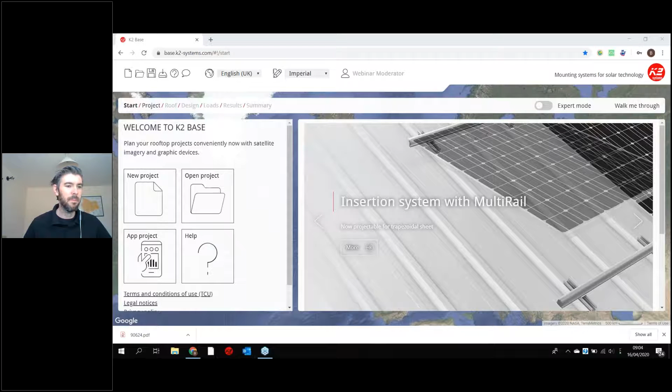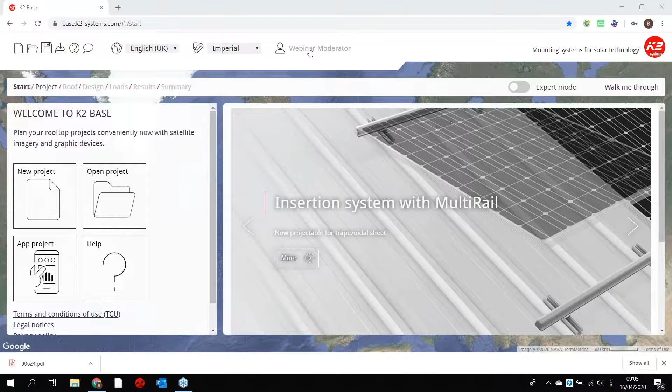So this is the start screen for Base. You'll see I'm logged in as a webinar moderator. You can use a reduced function version of the software without a login, but we recommend that you do get a login, which is very simple. You'll see there's just a sign up button here, and we will process that application immediately. So getting an account is free and it's easy, so we recommend it.

And then once you're logged in, you'll see up here your username. This is the way the screen is set out. So we have here the 4 boxes: new project, open project, app project, and help.

Now, app project is something we'll leave for future webinars. We've got a very nice, very clever smartphone app, which can interface with this software. There's more information on that on our YouTube channel and on our website, and there'll be webinars on that subject.

We also have these up in the top left screen, the same: new project, open project, save project, download project file, help, and Sherpa. Now, Sherpa, just quickly, is an online help chat, which also works over the WhatsApp platform. Again, we won't look at that today, but that's useful to know.

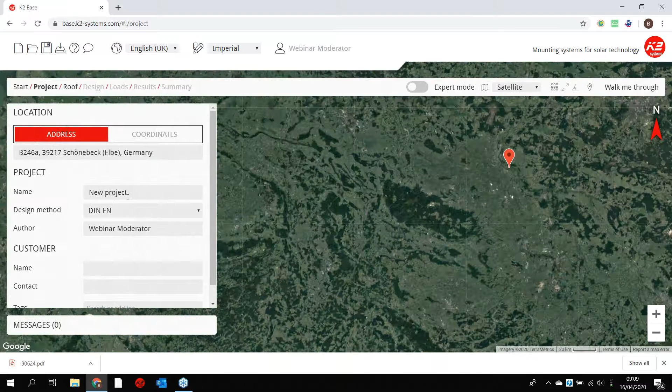Now, when you're working with an existing building, it's a very useful tool. For example, if we have a look here at the K2 Systems headquarters, you can see there's some nice buildings here that we could plan a project on. I believe that is K2 here, but there is a nice roof that we will use for this webinar up here.

So I could enter the address manually for this roof, or because I found it here, I can double click on it and the address autofills here.

Now I can put in a name for my project, and it's good to name all of your projects because on your user profile, you'll have all of your saved projects. By putting in a project name, as well as your customer name and contact, it's easy to keep everything looking neat and tidy and find all your previous projects. So for this one, we could just call it webinar 16th April.

The author automatically fills to your user profile name, but if you wanted to change that, you can. And then in here, you would put your customer name and your contact name.

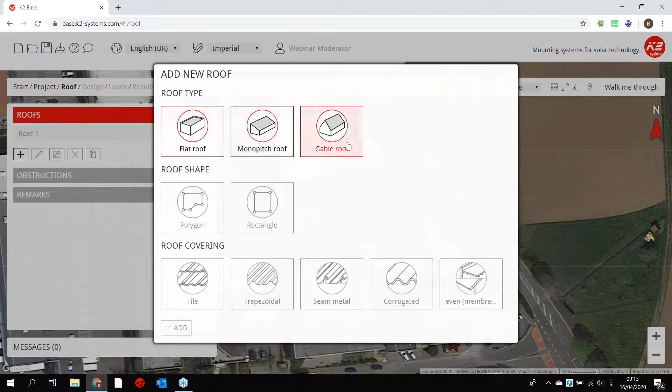So you see the options here again. We can access this button and not yet these buttons. And by holding your cursor over the buttons, you can see what each one is a command for. So here, add new roof, we click the button, then these are our options. So we want to plan a flat roof.

Now we can plan two roof shapes for flat roofs, polygon or rectangle. Rectangle is a simple four-sided shape. Polygon is a roof shape of infinite sides that you can draw accordingly. So to keep things simple, we'll go rectangle.

And then for roof covering, we only have one option because flat roofs really only have this option. But you can see for the software, we can also plan tile roofs, trapezoidal roofs, seam metal roofs, corrugated roofs. So we select flat roof, rectangle, and even, and then we add.

Now, I've received lots of phone calls from people who get to this stage and say, I've added a roof, but it's not there. This is because now is the time when you draw the roof, and you'll see the mouse cursor has become a cross. So we want to click on each corner of the roof and draw out our outline.

Now you see here the dimensions of feet, and up here we can toggle between metric and imperial. We'll use metric.

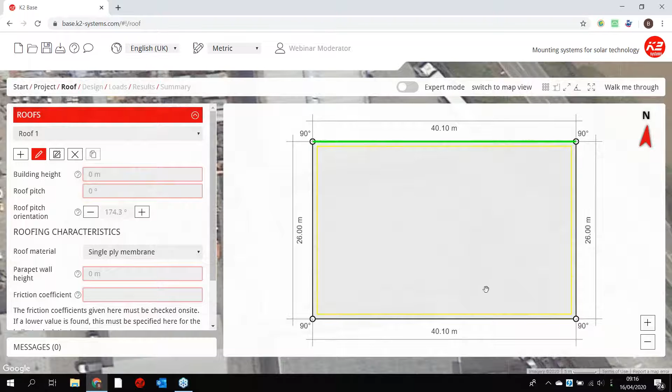And another regular question we get from people, they say, the building is not built yet, so how do I plan on K2 Base? Well, you can still find the approximate location and make sure you're working with the right local codes. But then by working in 2D view, you can ignore all of the Google map imagery and just work with the roof shape as you see here. So it doesn't matter if the roof is not on Google imagery yet, if it's a building that hasn't been built yet. So you can work in map view or 2D view, and you can constantly toggle between satellite, hybrid, and road map.

Now you see here on the left-hand side, some more options are available to us. There are some boxes that have come up in red as a reminder that these are important things that need entering.

We'll start with building height, which is self-explanatory, but for many of these parameters you'll see question marks. If you click on the question mark, you'll get a visual clue as to what you're doing, showing what building height is considered for a pitched roof and for a flat roof. For a pitched roof, some people might measure the height at the eaves or the gutter, but what we want is the height at the highest point of the roof.

So we enter our building height. You see here it's got 0 meters as default. When you type in your building height, you just put a numerical value, you don't need to put M for meters. So here we have a 10-meter building.

Now roof pitch, presumably we would expect something like a 1 or 2 degree pitch. So let's say 1.

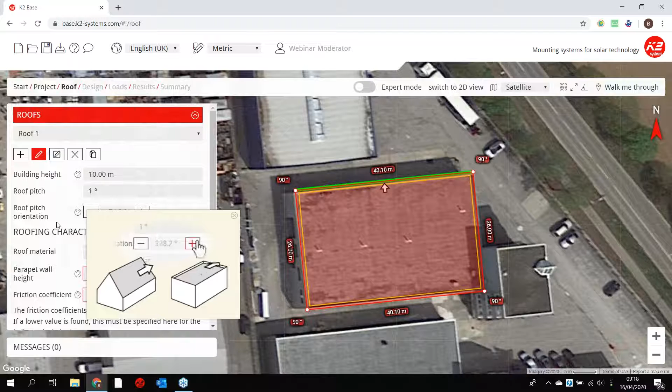Now roof pitch orientation, as we see here, we have the same parameter whether it's a pitched or a flat roof. For this, we want to know which way the roof does slope, so which direction the water would run off. We can change this with the plus and the minus, and you'll see on the main screen that the arrow points to a different side of the roof each time. So the arrow dictates which way the slope runs on the roof.

Next we have roof material. Our options are single ply membrane, bitumen, green roof and gravel. The reason we ask is because the thermal expansion parameters and the maximum rail lengths are different for the first two than for the second two. That is, we allow larger array blocks and larger rail lengths on green roofs and gravel roofs than we do for single ply membrane roofs and bitumen roofs.

This is because of the concept of caterpillaring, how a system has the potential to move slowly over time, and obviously we want to plan our system so that this doesn't happen. The problem is most apparent with single ply membrane and bitumen roofs, and less so with green roofs and gravel.

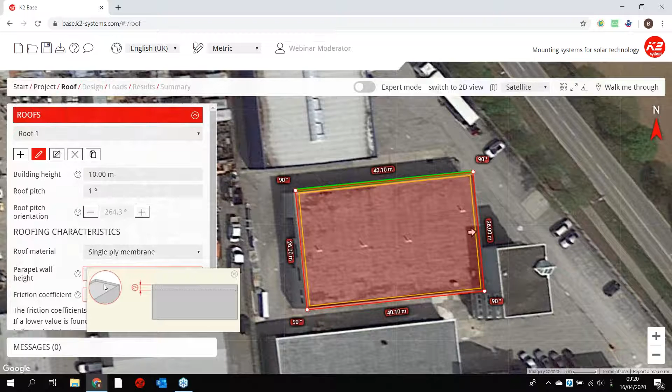Some people think a parapet roof is a good thing because there's the added safety that the system cannot fall off the roof. This is true, but parapet roofs can cause wind turbulence. So we need to know the height of the parapet wall, because modules that sit near the parapet wall may be subject to extra wind turbulence and may need extra ballast.

So we can put in our value here, say 0.3 meters. Next we have a friction coefficient. This is the interaction between the roof cladding and the building protection mat of the mounting system. A lower friction coefficient requires more ballast - in other words, if the roof is slippery, you need more ballast; if the roof has good grip underfoot, you need less ballast.

Now, how can you measure this? Well, we supply friction coefficient test kits. It's a very simple test - we've got videos showing how you use it - but essentially you have a calibrated scale and a 1 kilogram weight, and then you measure the force required to move that weight across the roof with the building protection mat between the weight and the roof. This helps us determine the friction coefficient.

Now, the friction coefficient is generally higher for bitumen roofs as they have small stones, and often lower for single ply membrane roofs, then higher still for concrete, gravel and green roofs. But the only way to really know is to do this test, and it's very quick, very simple. It does mean that you would need to get on the roof.

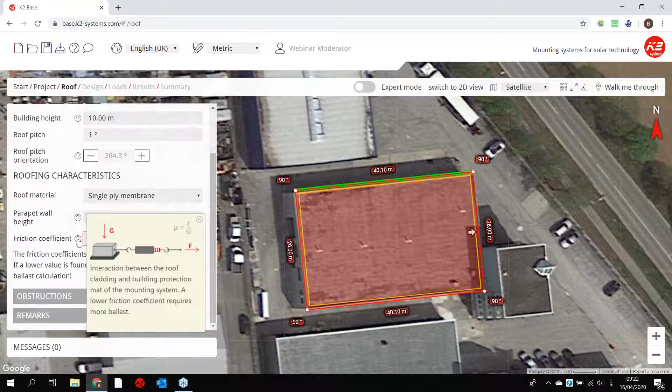So if you're doing a desktop survey before visiting the site, you may like to ask your K2 or distributor contact for some example friction coefficients for different roof coverings. Now we're planning single ply membranes, so we might expect something like 0.5.

Now we can plan in obstructions. We don't have to plan in obstructions - you can see that because we've filled out all the relevant information, we can access the design tab. But the obstructions section is quite useful.

We're going to draw our obstructions the same as we drew the roof. We can draw polygon obstructions, rectangle obstructions, and line obstructions. So we might draw some rectangle obstructions.

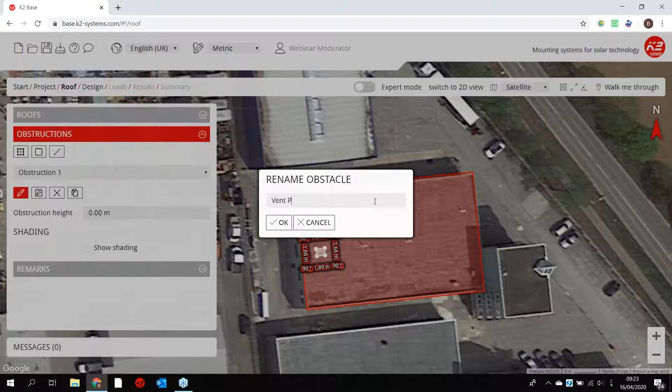As with roofs, we can name our obstacles too. So we might like to call this vent pipe 1, and perhaps we know that it's not that big.

We can change our dimensions in 2D view, and we can also change the height of our obstruction if we want to go into that detail, which is useful because the software will show you the extent of the shading caused by that obstacle. So you know that perhaps you don't want to plan your modules right up close to this obstacle, because you can see the dark area where you have the shading from the pipe.

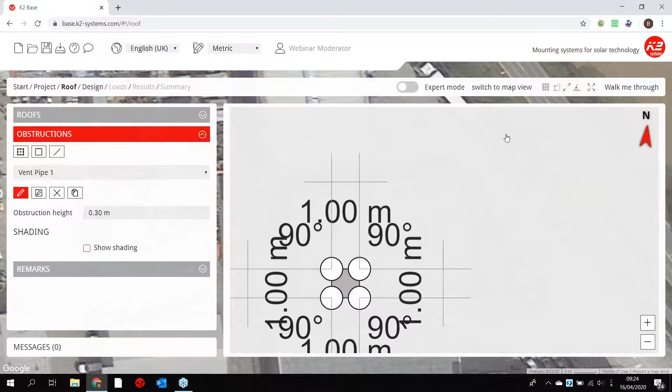Now you can see this roof has a few different obstacles, so we could quickly replicate each one and move these into the correct locations like this. We can also resize them if need be, and then we can delete them, or we can draw new obstructions.

We could draw a polygon obstruction, like that, for example. Now we might like to consider that this building here casts a shadow, which is obvious here, so perhaps we could draw in an obstruction. There's no physical obstruction, but maybe we want to avoid this area because of the shadow from this building.

And then here we have remarks. Not necessary, but for each project you plan you can produce a report which you can give to your client, or to your structural engineer, or to anybody. So in here you might put in your remarks - for example, this is a first stage or provisional report, all items subject to confirmation, something like that.

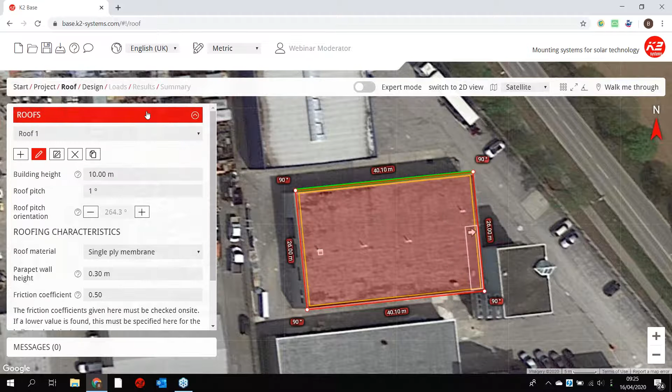Okay, so we've planned our roof. Now we want to plan our array, so we move to the design section.

First we need to select our module. We can access this large module database by searching here on the module name, or maybe quicker, we just enter the values manually if we know what they are. So we have our module details.

We now want to plan our module array, so we click onto module arrays, and you'll see here that the plus button, add new module field, is available. We also have this A and M here, which we can click at this point - orientate modules automatically, orientate modules manually.

So what this means - we have automatic as default, and this refers to the green line that you see here. If we were to plan an S-dome project with single modules south-facing, the back edge of the modules will be parallel with this green line. If, however, we wanted to plan them to face a different direction, for whatever reason, we would click this button here and choose the roof edge we wanted to orientate the modules against, or we can go back to automatic.

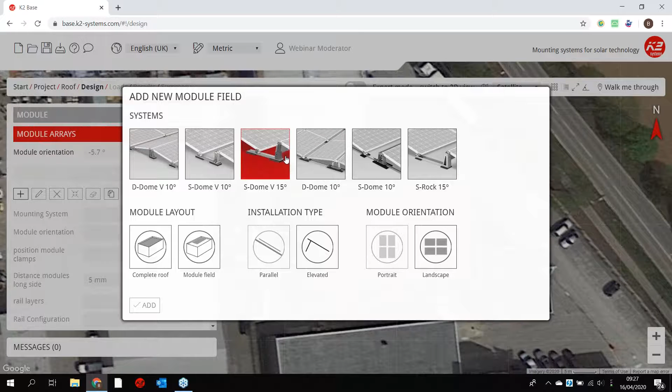So now we plan our array. Here we would select our system - we've got the system names and images of each of them. So I think today we'll plan our S-dome V10 degree system.

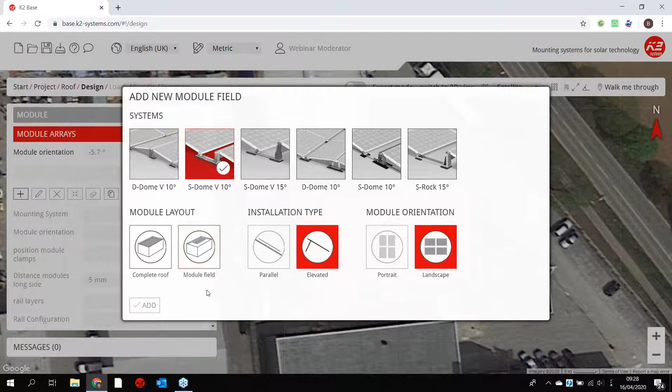So select that, and you can see the installation type automatically goes to elevated because it is an elevated system, and orientation automatically goes to landscape. So our available options here are to click complete roof or module field. If we were to click complete roof, which I'll demonstrate, the whole roof will fill with modules.

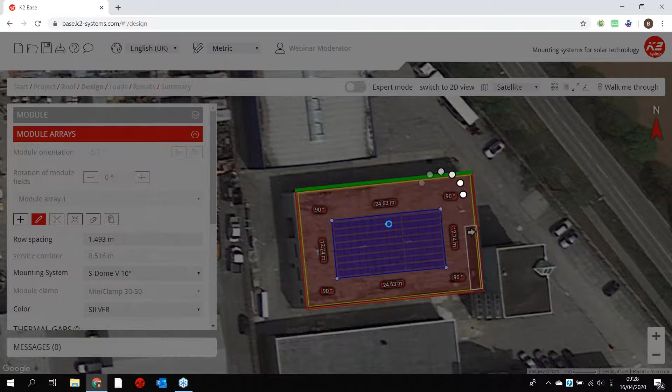And if we were to have selected module field, then the same as we drew the roof and the obstacles, we now just draw our module field by clicking and dragging an area as shown here. Now you can resize this. If we were to place this over the obstacle, you see that the modules are deleted where the obstacle is - same with over here.

And again, we can work in 2D view or in the map view. So let's have a look at what 2D view looks like. This is our array, we've got 9 rows of 15. We can manually change that by overriding these values, so 9 rows of 12.

Now back to this left-hand window. The row spacing will be automatically calculated according to the slope on the roof, the pitch of the system, the dimensions of the module, and the location of the project. But if you want, you can override this and type in your own value.

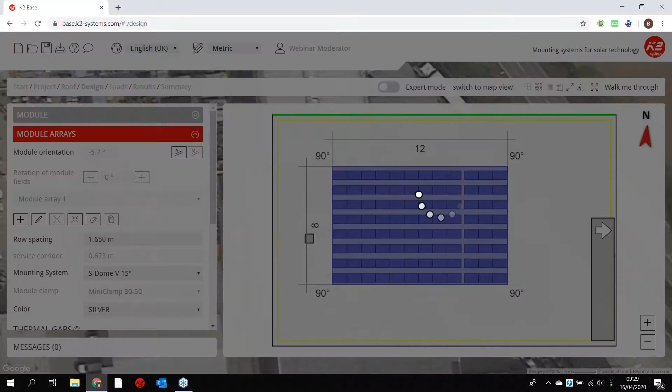You can also change the system as well. We did select this one, but if you wanted to, for example, use a 15 degree, then you can change it here, or even switch to a D-dome system, a double-sided east-west.

But we'll assume that this is our array. Next, we can select the color of the module clamp, silver or black, just to make sure the correct item is in our bill of materials.

And then we're on to our thermal gap section, which perhaps gets the most questions of any part of this planning process. So as it says here, thermal gaps are the breaks between module rows and columns to account for expansion of the material from heating.

So for those that don't know, we will always plan in thermal gaps for large arrays, because array sizes need to be kept within certain limits so the material can thermally expand safely without causing long-term issues with your project, such as caterpillaring, the walking that we mentioned before.

So we have our defaults here, and they're set to the maximum parameters, which is 10 modules, maximum 10 rows, and then maximum 9 modules in the row. So if we wanted to change this, we can override that again, put in 5.

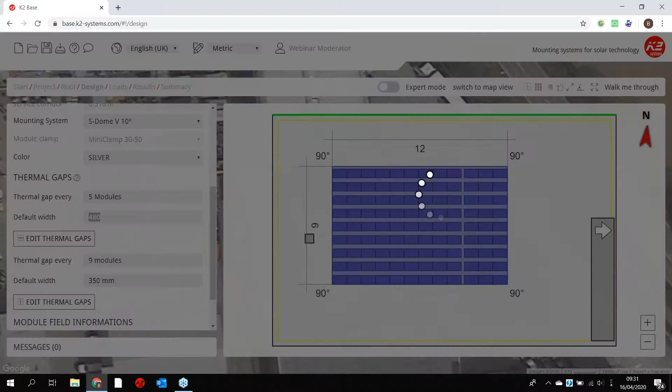You can see here that we have a thermal gap where the white line is. So because we entered a thermal gap every 5 modules, we count 5 from the front: 1, 2, 3, 4, 5. Here's our thermal gap, and then there's the other 4.

Now the other way to use thermal gaps is to plan in maintenance walkways. It's not always an issue with east-west because you have the gaps between the rows. But if, for example, you wanted to plan enough space to walk after every 5 modules for maintenance, you could put a thermal gap every 5 modules, width of 1 meter, and there's your maintenance walkway.

So that's quite useful. Down here we just have a reminder of how many modules we've planned and what the output power is. So now we have the option to move into loads.

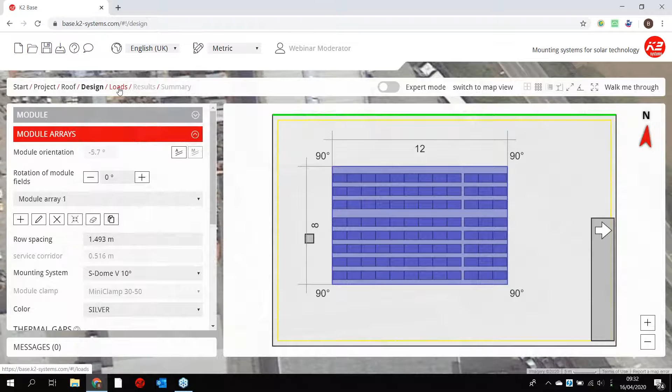We can see here again, here's the satellite image. You can take screenshots of this if need be to send to your customer. It's quite nice imagery, how it might look.

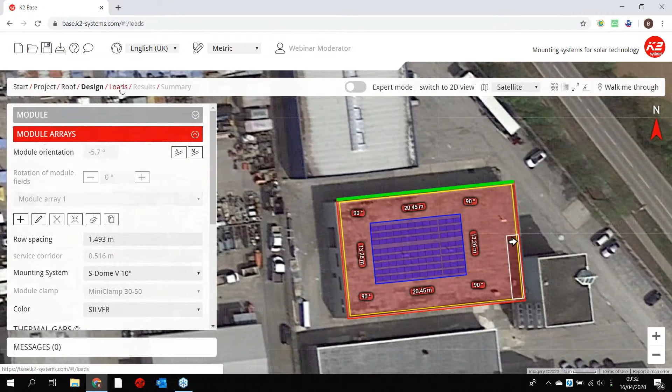Anyway, so loads. Now when working on projects in Germany and some other countries, we have a very nice function where the wind and snow loads are determined automatically, because the software knows exactly where we're planning the project. So we can click this button, and we have our peak velocity pressure for the wind load, 0.45 kilonewtons per meter squared, and our snow load on ground level of 1.28 kilonewtons per meter squared.

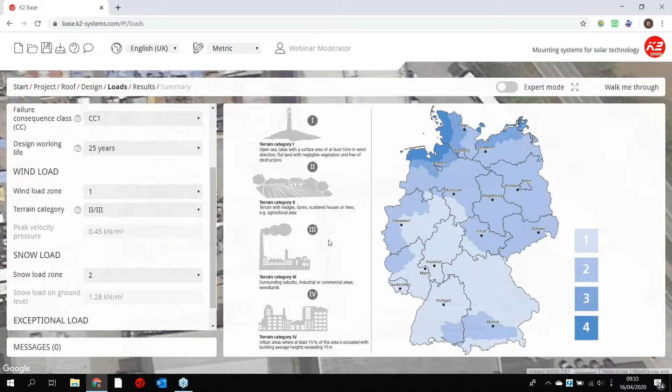Now, if we wanted to, we could enter this manually, or in ways that you might be more used to with the Eurocode, by entering the input parameters according to the terrain categories. Or if you know exactly what loads you should work with, for example, if a structural engineer has determined the loads and asked you to plan the project accordingly, then you can enter them manually in here.

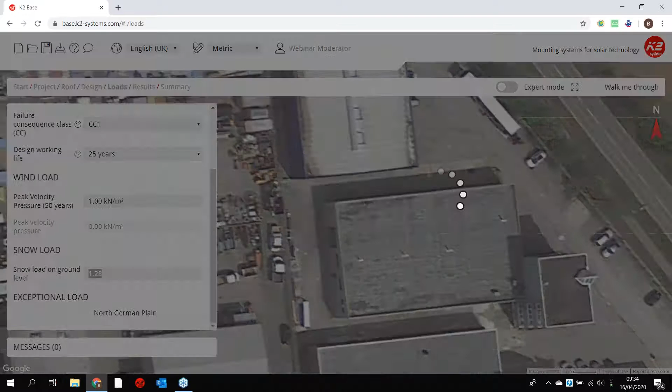So we've determined our loads. We can now click onto results, and you'll see here we have our ballast plan, and we have our numerical values for all of the ballast.

Now it's worth noting here, because of our thermal breaks, we've got 4 different array sizes. So we've got our 5 rows of 9, our 3 rows of 9, 3 rows of 3, and 5 rows of 3.

Now the general rule is the larger the array block, or the more modules interconnected within an array block, the less ballast required per module. So we'll see this: our largest array block, here we have say 5 kilograms, 5.5 kilograms, 3 kilograms over here. And our smallest array block, 30.5, 15.5. So you'll see it makes sense to plan large array blocks, because then you will need less ballast and it will cost you less to install the system.

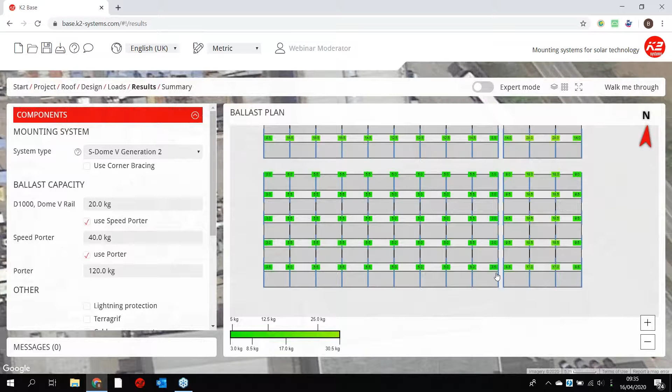This was all determined through our wind tunnel testing at the Wind Tunnel Institute, so it's all very trustworthy information. So you'll see at this point, perhaps we want to change our thermal breaks so as to balance out the ballast.

So we could jump back to design and find our thermal gaps.

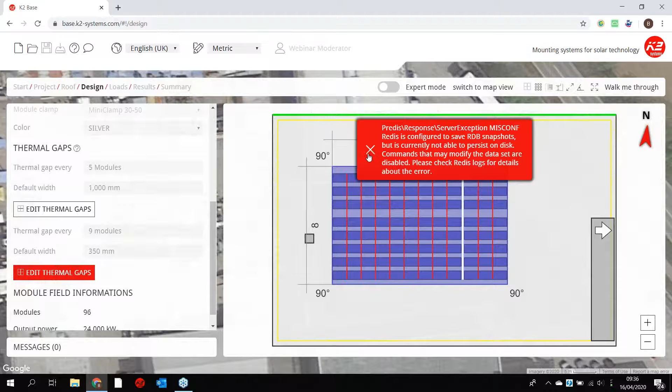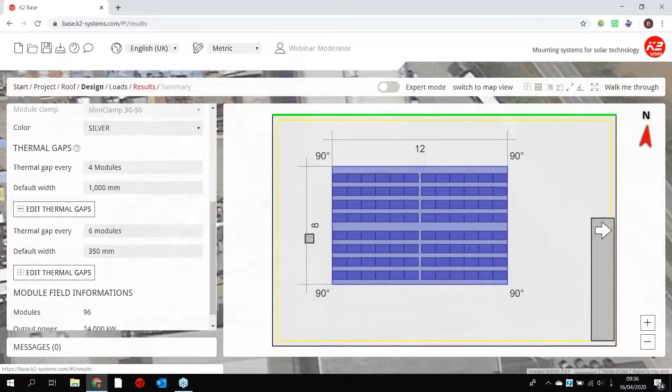Now, instead of having a gap after 9 modules, perhaps we'll have it after 6. You can see that the array is more balanced, and this one, instead of after 5, maybe we'll have 4. We jump back to results, and you find that the ballast is more balanced. So each array is comparable now, which perhaps is good for the structural engineer, so that the loads aren't concentrated on one part of the roof.

Now, system type. For the Dome V systems, we've got generation 1 and generation 2. Simply put, generation 2 supersedes generation 1. Other than that, there's not too much to know about it. Really, your selection should be based on availability, so it's a case of speaking to your K2 contact or your distributor.

Now, there's the option here to use corner bracing. Corner bracing is a feature that works best with D-Dome systems, not S-Dome systems. So my recommendation: don't worry for S-Dome systems, but for D-Dome, select corner bracing and compare your ballast values, because by using corner bracing, which is to use additional components to stiffen the array, the ballast required can be reduced quite drastically. So it's a very useful feature.

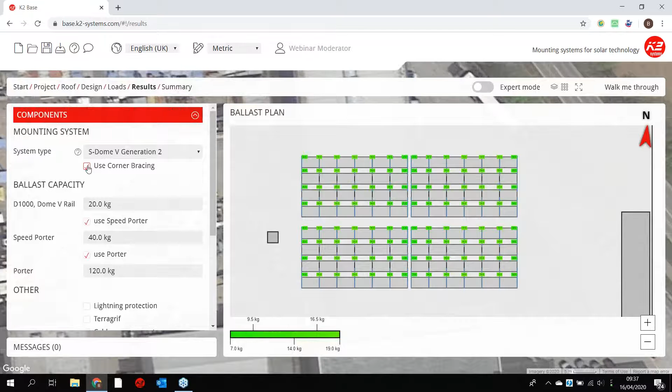Now here we have ballast capacities for the components. It's worth, unless you know otherwise, just leaving these as the defaults.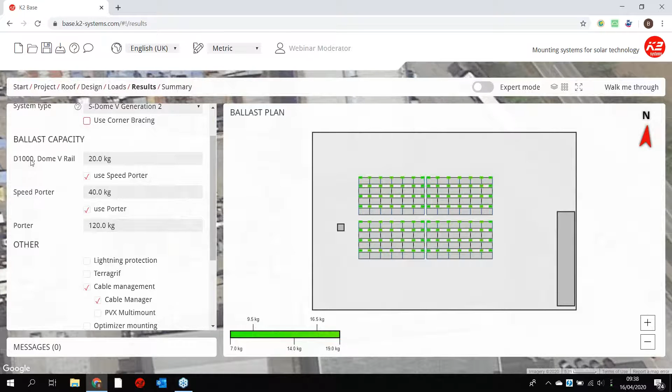This is the suggested amounts of ballast that you can get on the different ballast trays for the system. So the different ballast trays for this system are the upstand and the rail, because the rail is a ballast carrier. Then we have speed porters and we have porters. You'll see that the upstand and the rail can take about 20 kilos because of limitations on space. The speed porters about 40, and then the porters about 120.

Now we'll just jump down here. You see the ballast can be displayed in kilograms or in numbers of stones, which is useful. So if you know what ballast you would use, for example, if you use a 3 kilogram brick, you could put 3. And then on our ballast plan, instead of a value in kilograms, it just tells us how many bricks - 7 bricks, 6 bricks, 5 bricks, 3 bricks. It's very useful. Or we could change this to 5 kilos, and we'll see these numbers change. So this makes a very nice simple ballast plan for the actual installation work.

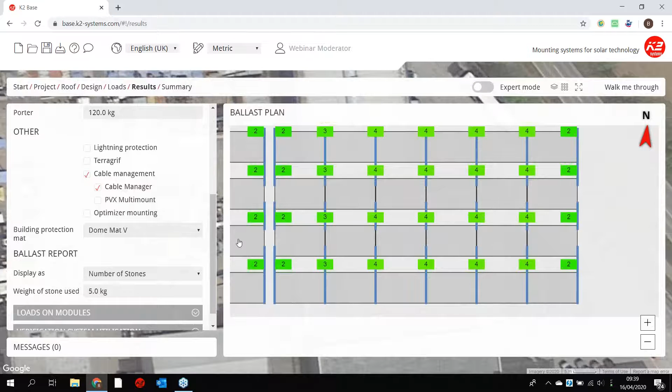Now here, these are all probably worthy of more in-depth webinars, so we won't worry about them too much. But these are optional extras we have for lightning protection, for earthing, for cable management, and for mounting of optimizers. And essentially, if you tick them, then you'll have extra components in your bill of materials.

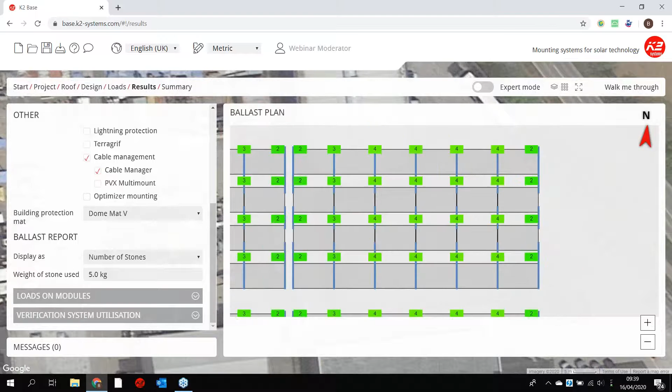So here we can also check loads on modules. Now, module manufacturers will tell you the maximum load that is permissible for the module for the clamping method. Now, these dome systems will have the module clamped on the short side in the corners. On our website, you'll see a list of approved modules where the module manufacturer has explicitly okayed this method, and they will tell you the maximum load that can be planned on these modules. It's usually 2,400 pascals. So you can see here we have 1,953. So we're within permissible limits for the module.

And you can see here as well, verification system utilization. So this is whether we are within the limits of the structural capacity of the system, and we are. We get a nice green tick, and all our values are below 100%.

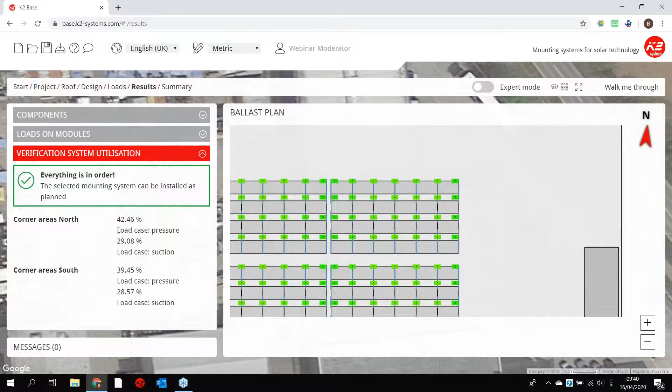So we can jump back and make changes at any point, or we can continue on to our summary. And here we have our bill of materials, and we have a summary of what we've planned. We've got roof 1, S-Dome V 10-degree system, our 250 watt modules that we didn't give a name to, 96 of them, 24 kilowatt peak output power.

And here we can produce our various output documents. So we can produce a project report with as many of these sections or as little of these sections as we like. We'll just tick the boxes for what we want - project data, assembly plan, ballast plan, results, structural analysis, horizontal and vertical loads, bill of materials. And by clicking generate, you'll download a PDF document.

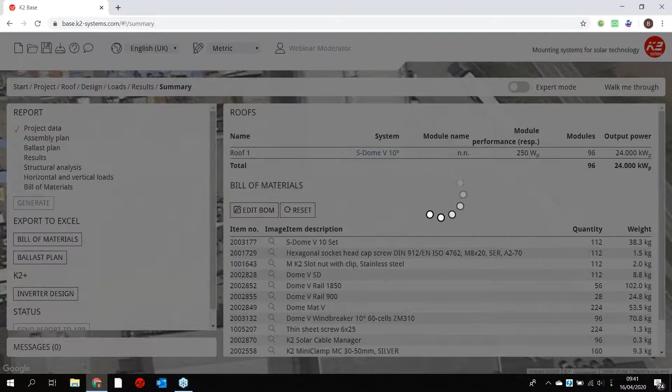Which I'll show you quickly. Now this is just the project data, so it's a short document.

This way we can produce any combination of reports and save them as PDFs. For example, the installers might just want the assembly plan and ballast plan, while a structural engineer might want the project data, structural analysis, and horizontal and vertical loads. So you've got different options. We can also export a ballast plan and bill of materials as an Excel file.

And then we have K2 Plus inverter design. Now we've got functionality and compatibility with Fronius, SMA, and SolarEdge designers. So if you work in K2 Base, you can export your design and bring it into those platforms as your starting point to save you duplicating your work. That's the subject of other webinars, but it's very useful if you work with those inverter manufacturers.

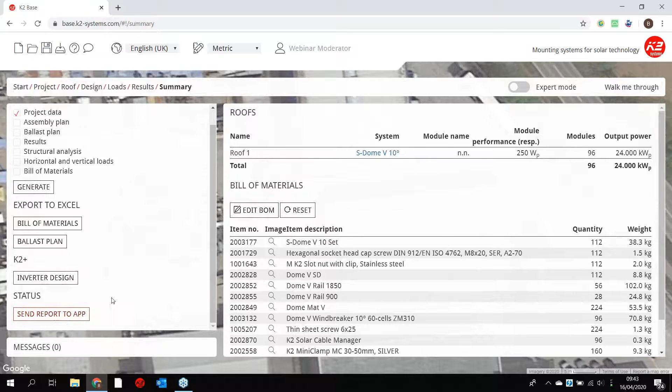And here, as I mentioned, is our K2 app. So this is how you would work and correspond with the K2 app. Okay, so that's a flat roof project that we've planned.

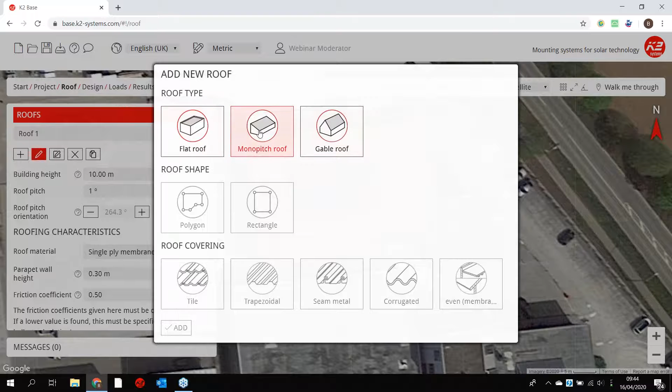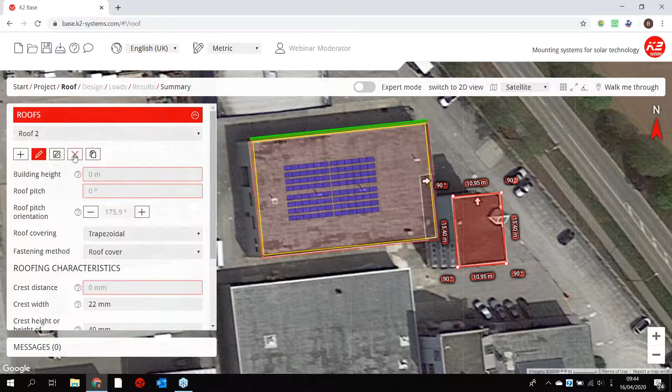Now we could plan a trapezoidal roof as part of the same project. For example, if we have two roofs here, we can just add another roof onto our project, a flat roof or a pitched roof. Assuming this was a trapezoidal roof, we draw this on here, and then we have roof 1 and roof 2 within the same project. Or we can go back and plan a whole new project for our trapezoidal roof, so we'll do that so we can show you some other features.

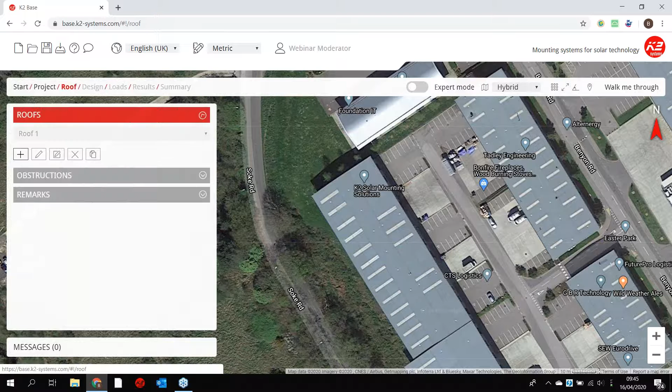Now for this one, I think we'll plan at our premises in the UK. So here is K2 in a lovely wooded setting in the Berkshire, Hampshire borders. So here we are, we could plan a trapezoidal metal sheet project here. I won't go over the parts that are the same for different roofs, but we'll look at what is unique for trapezoidal roofs.

So we'd be planning a monopitch roof or a gable roof. Now we want to select the correct one because the wind load zones are different for each type. For a monopitch roof, you have high wind loads along the ridge, whereas they're not there for gable roofs. So it's important that we plan with the correct one.

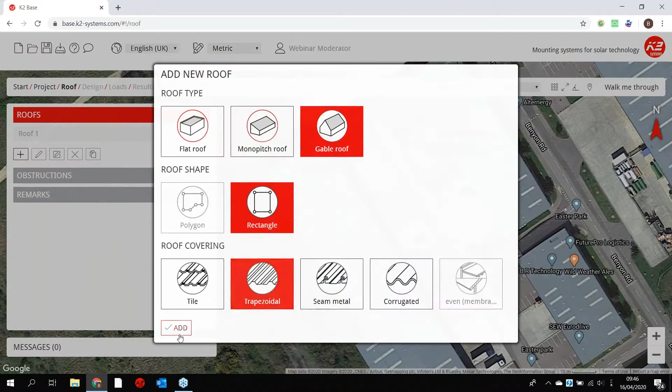So we'll choose a gable roof, rectangle shape, trapezoidal, and then as with before, we're going to draw on the roof. If you draw along the eaves first... let's do that again. We draw along the eaves, and then it'll automatically put the slope in the right direction. But again, we can change that if we want to and have the slope where we think it should be.

Now, one question that comes up sometimes is, should you draw over the whole roof like this, which is the northeast face and the southwest face, or should you draw over just the southwest face that you're using? So the correct thing to do is just the roof face that you are using, as we show here.

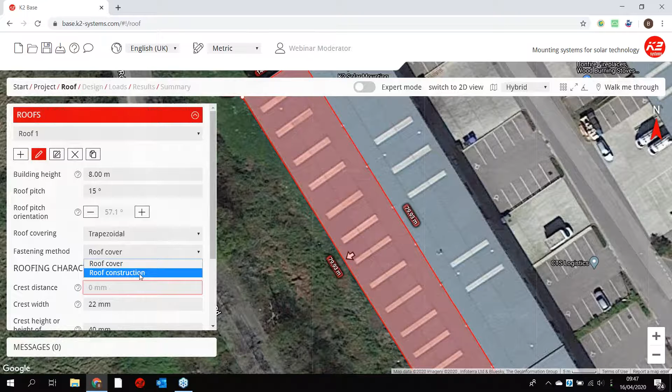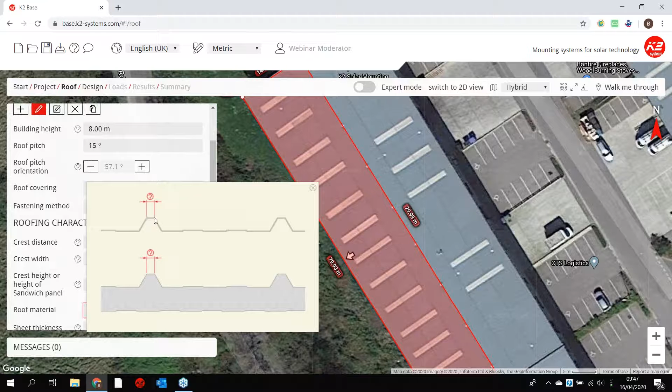So we will enter our building height, our roof pitch, our roof covering. We've got trapezoidal. Now with trapezoidal roofs, we can fix to the roof covering or the roof construction. We're just going to cover roof covering here because that is what is done 9 times out of 10. So the important parameters we need are the crest or crown distance, as shown here. A common distance is 333 mil, and the crest width, which is the width of the top part of the crown. Another common one is 31. And then the overall height.

Now, the important thing for planning these systems is to know particularly the roof material and the thickness. So perhaps we know what system was installed on the roof and we can find a data sheet, or we need to measure this at a survey with calipers. But generally we might expect a steel sheet with a 0.5 mil thickness. It's important to know this because we're fixing into the steel sheet with self-tapping screws, so we need to know exactly how strong these screws are going to be on the steel sheet, and the thickness has a fundamental impact on this.

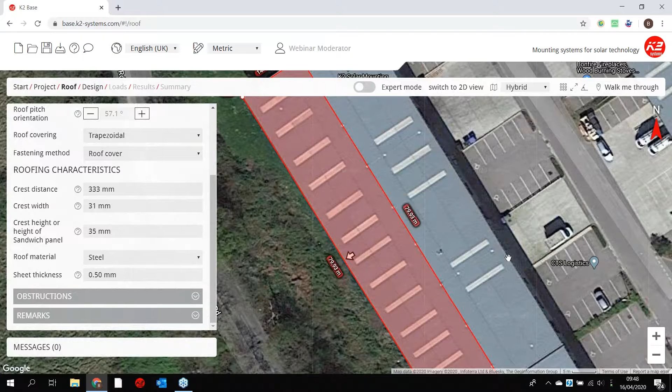Now you can see there's lots of skylights here, so we could draw these on. We could duplicate these.

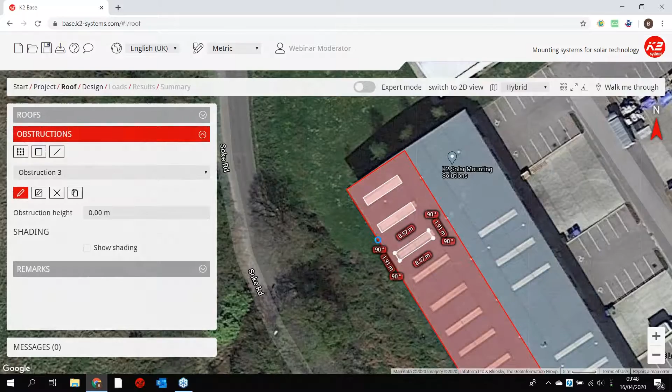And so on. We enter our module array.

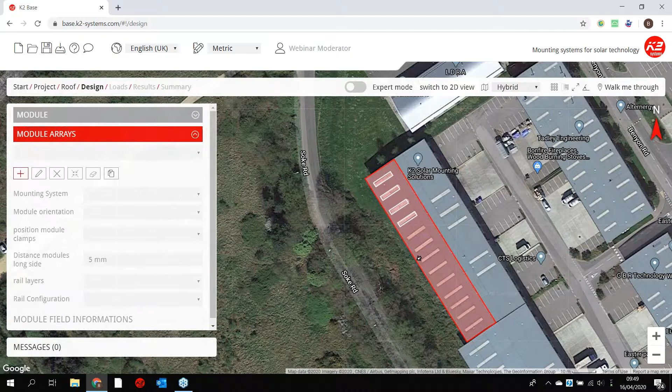Now here you see we have some different options, so our systems for fixing onto trapezoidal sheet metal.

We've got mini rail, mini 5, speed rail, multi rail, and our insertion system. Mini rail, speed rail, multi rail, and the insertion system are all roof parallel, whereas mini 5 is elevated. The mini 5, for those that don't know, is to use the mini rail system and have a 5-degree elevation on the modules. Generally for roof parallel, you would use multi-rail, mini rail, or speed rail.

Multi-rail is a short 10-centimeter rail with 2 screws. Mini rail is about 40 centimeters, it crosses 2 crowns and has 4 screws. Speed rail is continuous rails that fixes to the roof with these black speed clips. So we'll plan a mini rail system.

Module orientation, we can choose portrait or landscape, and again, complete roof or module field. So we'll plan a complete roof in portrait. You can see the obstructions mean there's no modules planned around the skylights that we entered.

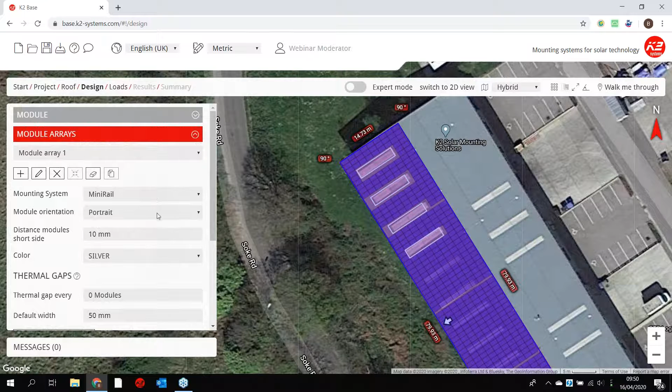Okay, so mounting system, mini rail, module orientation, portrait. Now perhaps you'd like to see if you can fit more on the roof with portrait or landscape. So portrait, you can see we've got 628 modules. If we try landscape...

627. So perhaps this helps you make the decision of what layout to use, as in how you can fit most on the roof.

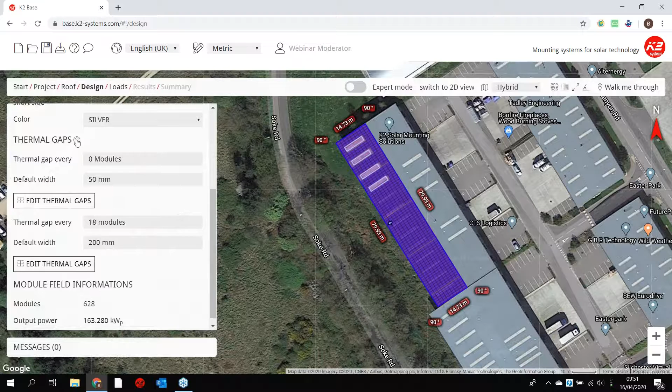So again, we have our thermal gap parameters. You see for mini rail, we would want a gap along the row every 18 modules, and you can see that they're shown here. We wouldn't want anything greater than 18 modules, but again, perhaps you would like maintenance walkway after every 10. So we could plan this in same as before.

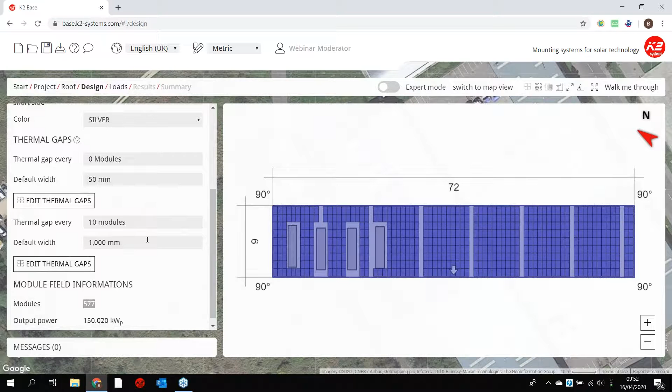And there we have our maintenance gaps. And now we have 577 modules. So you can see how it constantly changes depending on our parameters.

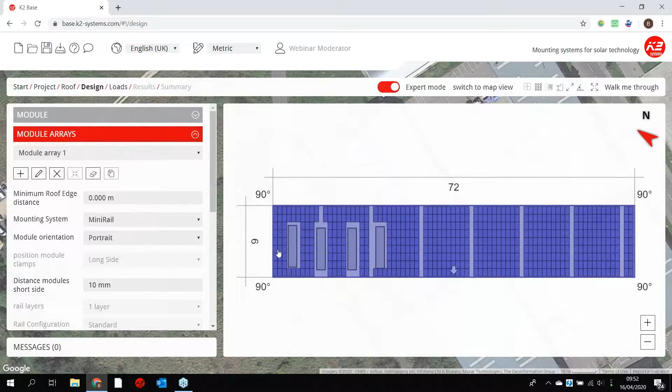Just noticed we're not working in expert mode. Now, we've toggled to expert mode, and there's a useful parameter that pops up, which is minimum roof edge distance. Now you can see here that the modules are planned right up to the roof edges, which is perhaps impractical. So we could change, for example, 1.5 meters, and then we have a nice perimeter around the array. And again, we can check how many modules we have, 436.

Something I didn't mention with the S-Dome system is how to change this array if you've planned whole roof. So we can delete individual modules just by selecting the delete function and clicking on the modules.

We can also delete whole rows and whole columns. So here I'm holding shift and click and control and click. So that's an easy way to delete multiple modules at once.

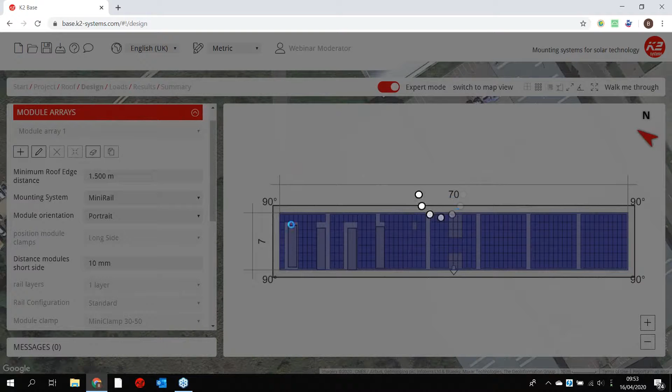And perhaps we decide that we don't want 7 rows of 70, we want 6 rows of 70. We can click this edit module array outline, and we now are able to manually change these figures.

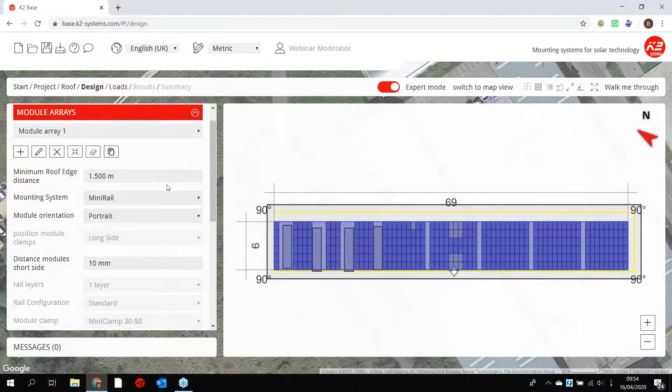Okay, so here's our mini rail array that we've planned with our 1.5 meter minimum distance from the roof edge, modules and portrait. Now distance, modules, short side. This is a level of detail that perhaps you don't need to worry too much about, but everybody has a preference for the distance that they would leave between the modules here where they're not clamped.

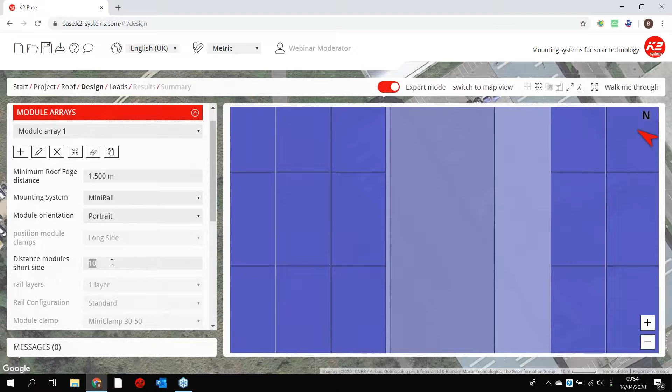Some people use a mid clamp as a spacer. Some people just go with what looks good. So you can plan in accordingly, but as a default here, we've got 10 mil.

Now calculating loads in the UK, there's currently no automatic function, but we are working on it. So you're referred to the wind load map according to the UK National Annex of the relevant Eurocode.

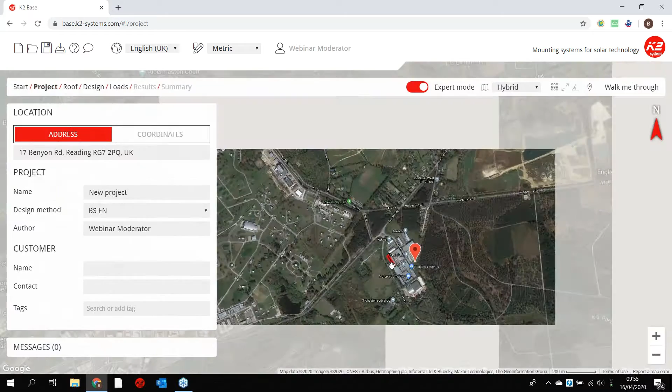Now, if you're not sure where you are on this map, you can jump back to project and zoom out. You can see where exactly you're planning, or you can refer to Google Earth, for example. So we're within the 21.5 meters per second area.

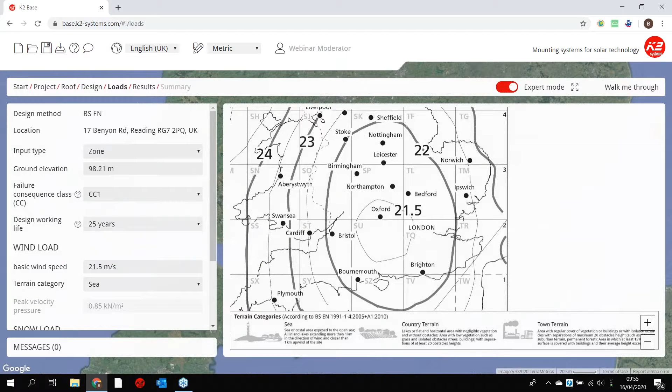The terrain category here is country or rural, and then you can measure the distance to shoreline on Google Earth, which I think is around 50 kilometers.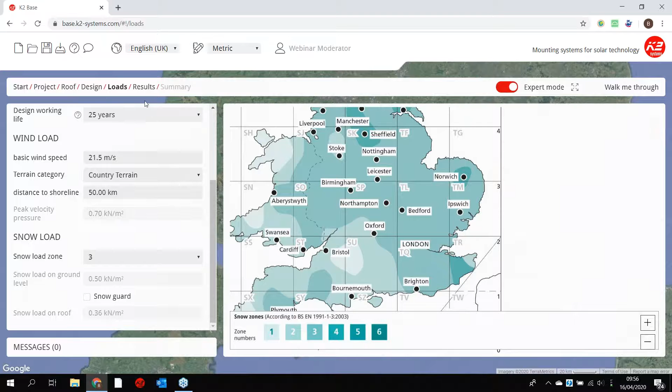And now we have our peak velocity pressure and our snow load on roof. So we have the loads that we are planning for. We select results.

And here is our mini rail system planned. So these are the mini rails. Now if we show the roof structure, you can see each rail is fixed to 2 corresponding crowns.

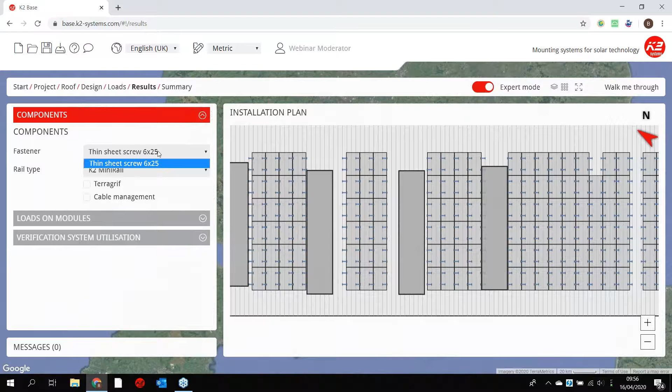Here we have the fastener. There's only one option with the mini rail, there's nothing else to choose, but this is what it is. So you're fixing to the sheet with a 6 by 25 mil screw, and the rail is the mini rail.

And again, we have the options for module earthing with Terragrif and cable management. So we can check the loads on modules again to see whether they are within the limits set by the module manufacturer.

And we can check the system utilization. So we can see here the fastener is at 97.98, which is below 100%, which is great. Everything else is below 100%. So the selected mounting system can be installed as planned.

We can see also, up here on the top right, we can select which layers that we view in this screen. So we've got base rails, fastener, roof structure, and obstructions selected. We can take any out and put them back in. But roof zones is quite useful to see.

Now the roof zones are split according to Eurocode, and they refer to the impact of the wind loads on the different areas of the roof. So the grey central area is what we call the field area, where the loads are the least. And then we have yellow areas at the eaves and at the gable board, where the loads are much higher.

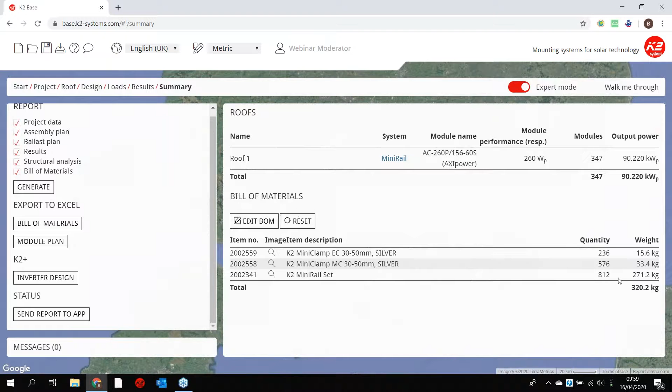Now, if you're going to send your bill of material to a distributor, it's important to know that this bill of materials is exactly what is required. There's no spares allowed for in there.

So if you wanted to, you could edit your bill of materials, change your figures manually like this. And this would apply to the documents that you output to then send to your distributor or to your K2 representative.

Okay, so we've planned a flat roof system and a trapezoidal roof system, which are probably the two most common roof types.

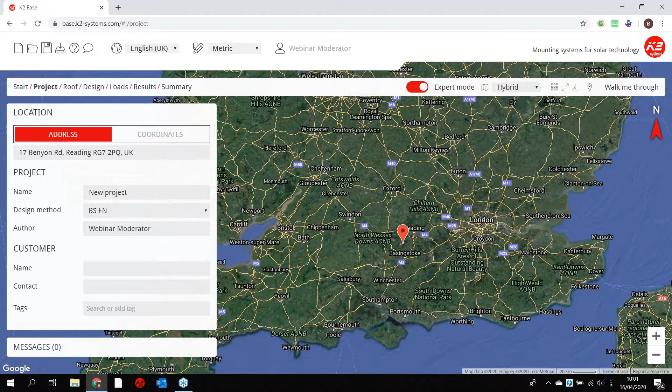So we touched on it briefly, but perhaps not with enough time. So this distance module short side, this is the gap between the modules in the column. So it's not a gap where a module clamp is, but you might like to leave a larger gap for heat dissipation or for aesthetics or anything. So here you just change this.

Sorry, I've changed the wrong parameter there. Distance module short side, you change this, and that will change this distance between the modules depending on what you'd prefer it to be. As default, it's set to 10, so there is a gap. And I think you'll see that our minimum is 5 mil, which I presume is a recommendation of module manufacturers. But yeah, whatever you want it to be, you can put it in there.

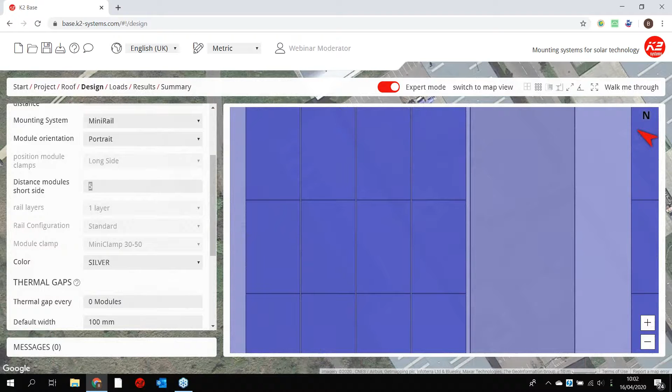Michael, a question about the bill of materials. If you enter a value lower, does it go red? Good question. Let's see. I don't think so. No, it's still green. So anything that's altered is highlighted in green. And then you'll get this message flag up on everything that you do to remind you that there's been a manual alteration. So yeah, there's no color coding for good or bad. It's just color coding to show that there's been an alteration.

Okay, what else have we got? Joseph, there's a module which is not in the list. Okay, well, for now, you would just need to enter your details manually by clicking user defined and putting them in here. I mean, you can even type in BYD so it appears nicely in the report. But we can look at getting that added into the database. I don't know exactly how we do that, but I'm pretty sure it's possible. So we'll make a note of that and see if we can get that one added to the database for you. So the BYD PHK-30-280-5BB.

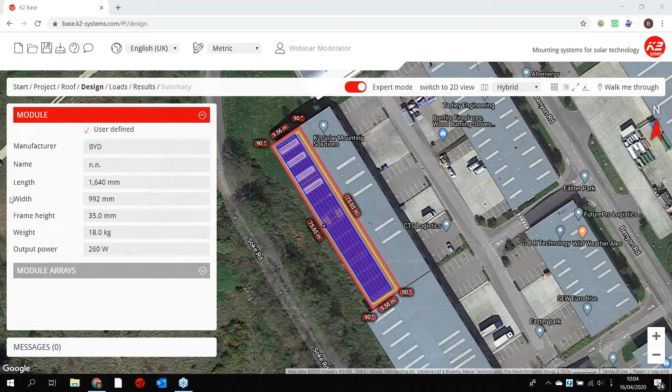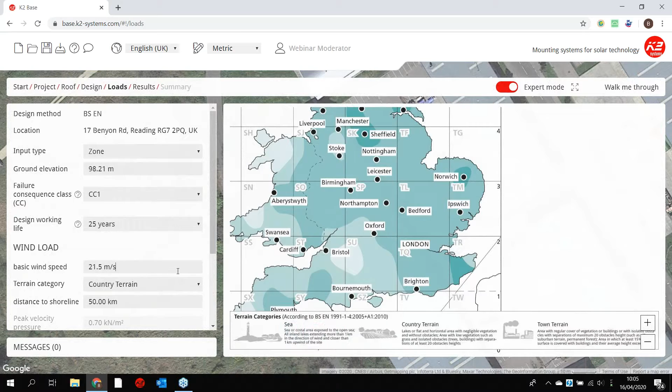So depending on the country that you've selected and the design method that comes up, you're working according to the relevant Euro code, which is a very simplified version of all of the parameters needed to safely calculate your system. So here we only enter a basic wind speed according to this map, but the Euro code does allow for high wind gusts and storms that are within expected limits.

Everything in here is according to the Euro code. The Euro code is a long, detailed technical document, but there is provision in there for storms and for wind gusts. So generally speaking, by using the correct basic wind speed here, you can have confidence that storms are accounted for. There is an argument that storms are getting worse with climate change, and I believe Euro codes are being looked at and revised in accordance with this. But at the moment, we work with all the current Euro codes, the relevant standards and input parameters. But there's nothing wrong with using a higher basic wind speed if you feel it's necessary.

For example, we did a project recently for a customer in Dover, right on the coast, where the sea was facing sort of three sides of the array. Now we could have used the wind load that Euro code gives us here, which is, whatever, 22.7, but we planned for a basic wind speed of 27 meters per second, just for that added security. The request came originally from a structural engineer who said you should plan according to a higher wind load. So that can be done.

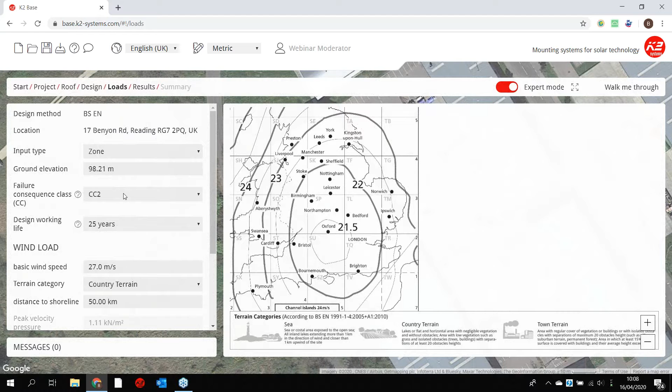Or certainly, when you're referring to your system verification, which here is high now, but before we had, say, 99%, then perhaps you say, okay, I don't want to plan for 99%, I'd like to keep it below 80% or something. There's different ways to factor that in, but generally speaking, the Eurocode wind load data allows for storms and gust speeds, so you can have confidence in this data.

So Dio, I hope that answered your question. I hope I'm pronouncing your name correctly. There's a few others popping in, let's have a look. Yusuf from Indonesia, oh, that's been answered. Yeah, I think we've covered everything. I'm sorry if we've missed any questions.